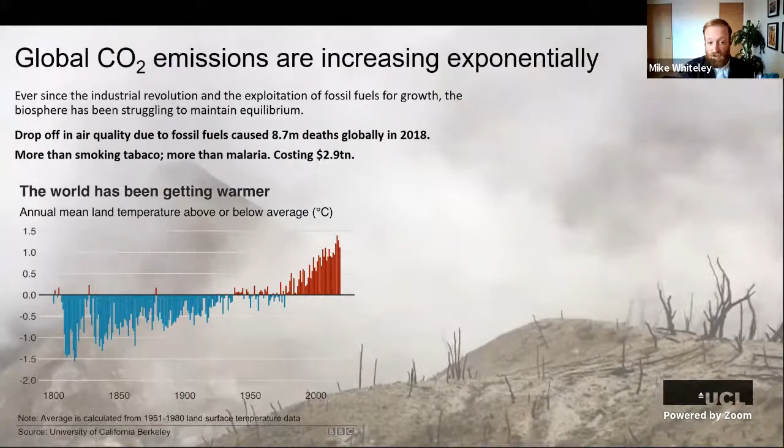And I've mentioned some of the global level difficulties here, but there's also local air quality concerns. So some recent work by UCL, that was in the news recently, has shown that a drop off in local air quality due to fossil fuels actually caused 8.7 million deaths around the world in 2018. To put this into context, this is more than smoking tobacco or malaria, and costing the health service more than $2.9 trillion. Some of this data from California, Berkeley, shows that the globe is warming up, and we need to put the brakes on.

And when we talk about transport, this can be anything from personal transportation, so how you get around in your car or on public transport, all the way up to international flights for your holiday in aviation, but also freight, so on the roads through heavy goods vehicles or in international shipping. And because the government is signing up to these ideas of reducing emissions, the UK industrial strategy has 4 grand challenges, and one of those has been set as the future of mobility.

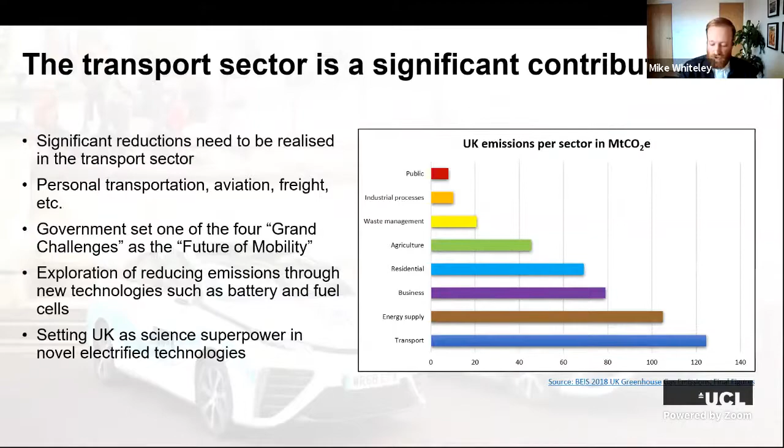Through the future of mobility, we're exploring reducing emissions through new technologies such as lithium-ion batteries and hydrogen fuel cell technologies. And ultimately, we're trying to set the UK as a science superpower in these novel electrified technologies. So I think sometimes we can be quite critical that governments aren't doing enough, but I think we're in a good position in the UK where the government is getting behind these ideas.

So there's the ban in 2030 of petrol and diesel cars. This basically means that in 2030, it will be illegal to sell cars in the UK that are 100% powered by petrol or diesel internal combustion engines, and they must have some kind of significant hybridization. So plug-in vehicles and full hybrids will still be available, which is a great first step.

And then a close target after that of 2035: every car sold in the UK must be 100% zero emissions, so have no internal combustion engine whatsoever. And some of you may think, well, this is a long way away, 2035, we've got lots of time, what's the worry? But if you know how the automotive industry works,

if a car company, just pick any car manufacturer, is designing a new vehicle, it will take 5 years or more just to design their latest model of a car that uses their conventional petrol and diesel engines, where they don't have to think about a new technology. But now they're going to have to think of what's the power source of the future, what's the propulsion system of the future, and do all this in a very short amount of time.

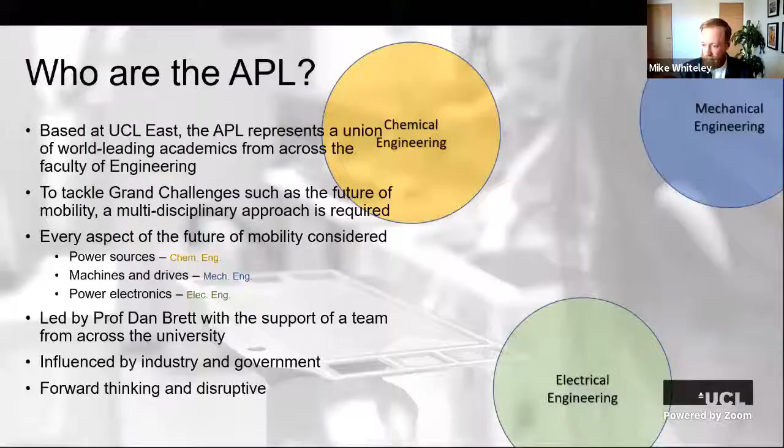Based at UCL East, the APL represents a union of world-leading academics from across the Faculty of Engineering. So as you can see here, we have chemical, mechanical, and electrical engineers all coming together in this trifecta of excellence, bringing all their expertise from their respective fields. And that's because to tackle these grand challenges, such as the future of mobility, we need this multidisciplinary and interdepartmental approach. We can't use the conventional academic way of having these siloed structures.

So when we created the APL and the vision behind it, we thought, what is the application of the future, be it a passenger car or a train or whatever it is that needs these new technologies? What would it need? And obviously we need new power sources. So that's where we need these new engines that don't use fossil fuels and don't burn anything. So this is batteries, fuel cells, supercapacitors, and that's where the chemical engineers come in.

And then machines and drives. How are we going to turn this electrochemical energy into useful work, how to propel a vehicle? And that's where the mechanical engineers come in with electric motors and electric powertrains. And then finally, with the electrical engineers, we're looking at power electronics. So how can we charge and discharge these systems? How can we monitor them, make them talk to each other? And that's where the power electronics is where the electrical engineers come into play.

So ultimately, this is led by Professor Dan Brett, who's a chemical engineering professor, but he has a support team from across the university. And these last 2 points, I think, are quite important. The work that the APL is doing on UCL's campus is heavily influenced by industry and government. We see that the work we need to do needs to have a commercial viability. It needs to be something that will be implemented and used by the general public for the benefit of society.

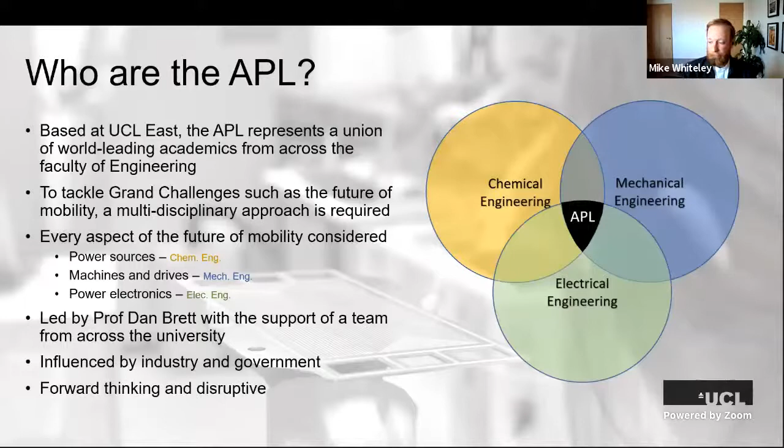So I hope that gives you the overall view of what the problem is and how we're trying to answer it. Now we'll do a bit of a deep dive into some of the technologies that we're currently researching and scaling up at the APL. And as mentioned previously, hydrogen fuel cell work was my bread and butter. This year is my 10th year looking into this research, which makes me feel old, but this is the stuff I get excited about. So we'll have a bit of a deep dive here, so strap your thinking cap on. I promise it won't get too technical.

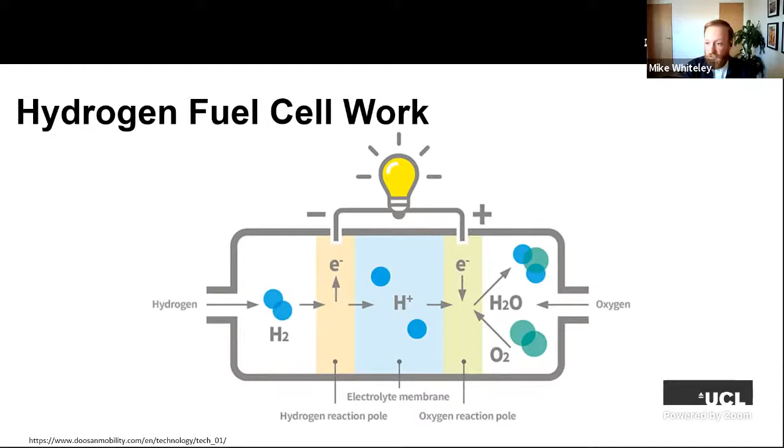Whilst all this is happening, at the other side, oxygen just from the air that we breathe is passed over the other side of the fuel cell, meets another catalyst area, and then this is where the proton and the electron from the hydrogen side meet the oxygen molecule, and that's where we form H2O, which is just water. So at the point of use, a fuel cell only emits water vapor, which makes it a perfect green technology at the point of use.

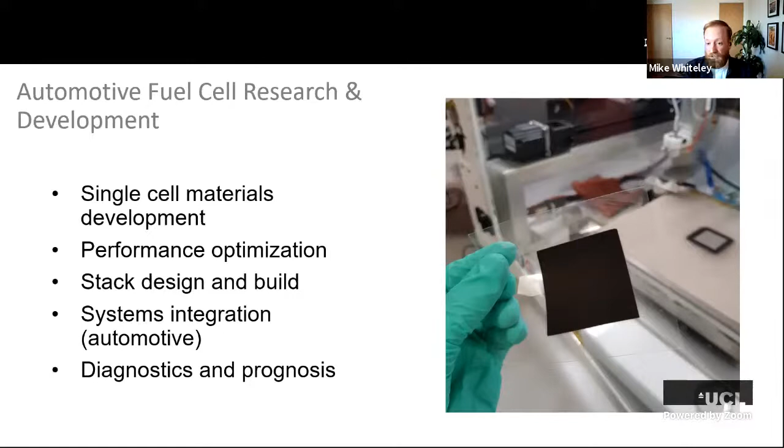In this application, where there's 60 or 80 cells, you can get around 60 volts. And then when you multiply that by the high current that a fuel cell produces, you can then get, I think this one here is about 8 to 12 kilowatts in power. And that's enough to power everything in your home, from your TV, your lights, your kettle, electric shower, and that's how fuel cells could be used.

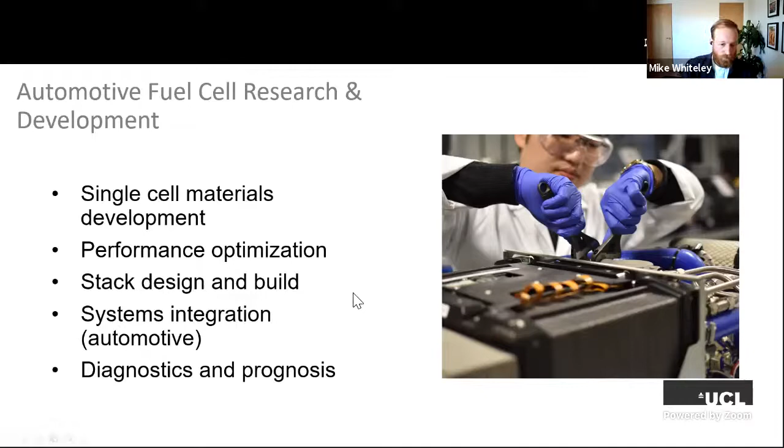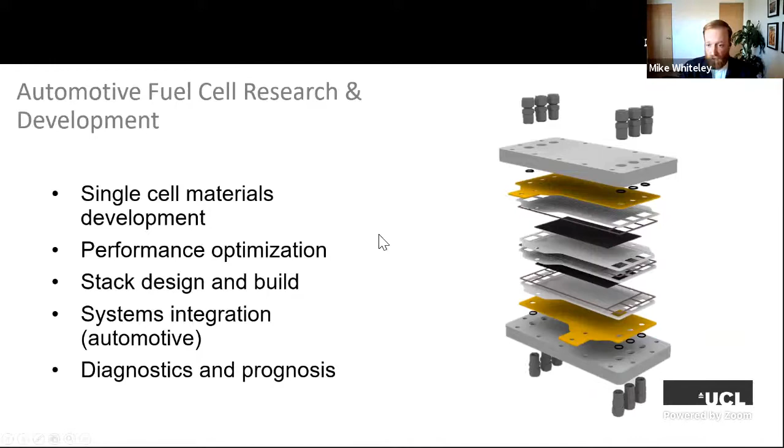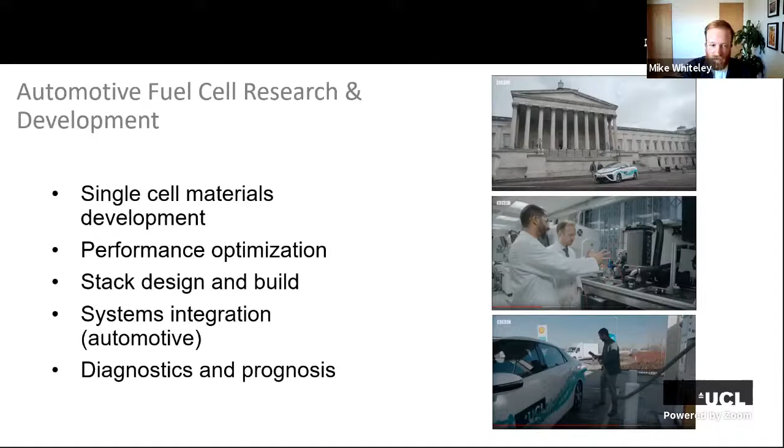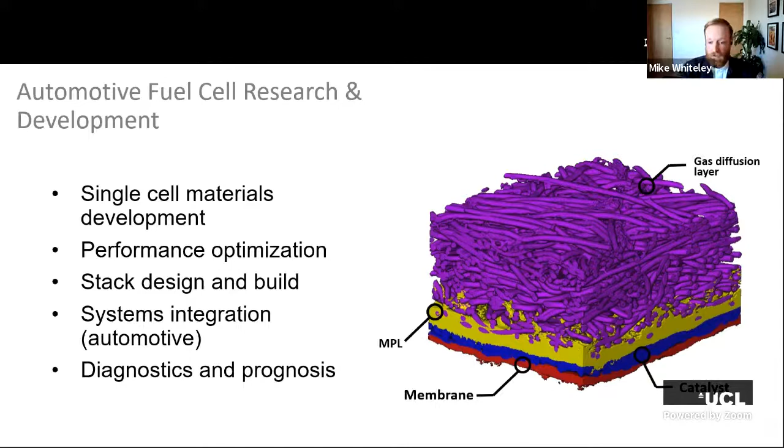So to stay with that thought process and CT, I'm going to give a bit more detail of the recent work that we've done with CT and a recent paper that we published. So these next two slides with Homer Simpson, they're brilliant. They were kindly given to me by Dr. Francesco Iacoviello, who's in UCL. He's the X-ray guru, and this explains the process that we use.

And some of you might have come across this before, where you've heard of CAT scans or CT scans for internal medicine concerns, and it's used in the medical field a lot. It's the premise of using a radiation source, like an X-ray tube, passing through a patient in this case, and then at the detector side, you can see what's happening inside. And we use the same thing to look at what's happening inside batteries and fuel cells and supercapacitors. But the radiography, that's one picture that you normally use for looking at broken bones.

But the CT aspect is if you can take one image, rotate the object or patient, take another image and do this through 360 degrees, you start to build up a lot more data. Now, in a medical context, the patient normally lies on a machine still, and then the machine goes around them. We do the same, but in reverse. So we have the machine staying still, and then we rotate the fuel cell or battery. So once you've taken all these images, you've got quite a lot of data. We can then use machine learning techniques to reconstruct all these images in a computer environment.

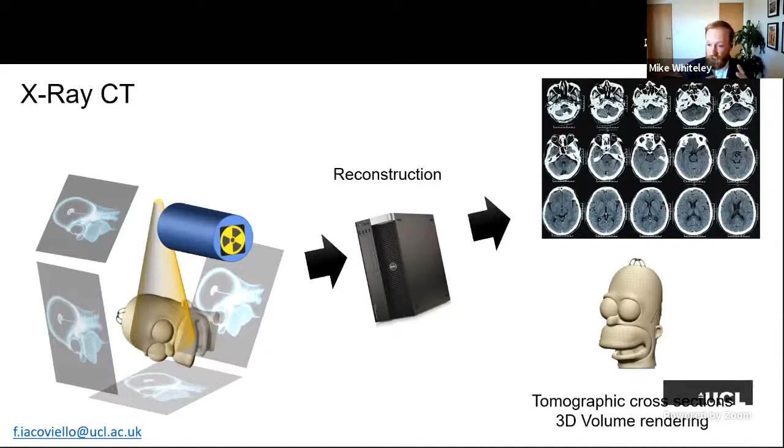And then we have two different ways of looking at this data. So the top section here is something called tomographic cross sections. This is where you can look slice by slice through the thing you scanned, looking at the internals and seeing what's happening. And at the bottom here, we can also stack these all up effectively and build a 3D volume rendering. And that's what you saw previously for a fuel cell. So I'm going to go on to a paper that we recently published looking at exactly those techniques for fuel cell research.

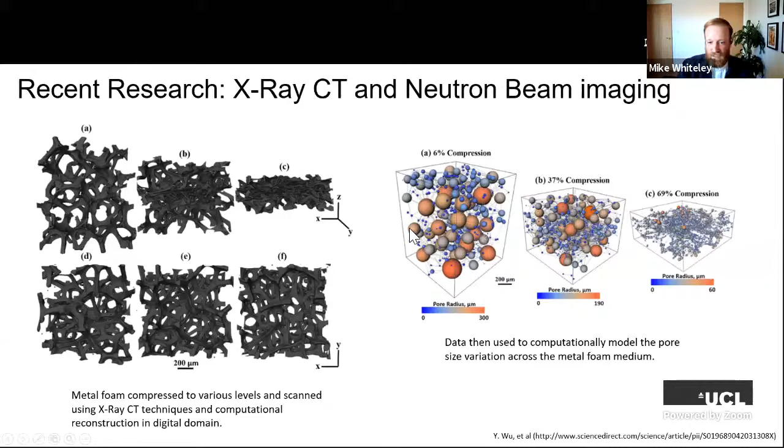So if we want to look at how fuel cells operate, such as gases in and out, water in and out, we can do things like computational fluid dynamics, or CFD. So this is a technique where you can use the model that we scanned in a digital domain to model how fluids, so it could be a gas or a liquid, flow through your material.

And as you can see in this application, the more you crush the metal foam, the faster the gases go through. Which sounds great, because that means you get more gases going through, you get higher rate of reaction, more power. Well, yes, but it's at a trade-off, because we also did some pressure drop analysis, which showed the more you crush this material, the harder you have to actually force those gases through, because of these Venturi effects where you get the speed up of gas.

So that means, yeah, you do get more performance out of the cell, but then your balance of plant systems, like the air compressor, has to fight a lot harder to push these gases through. So there's this fine balance to be had in fuel cell systems engineering.

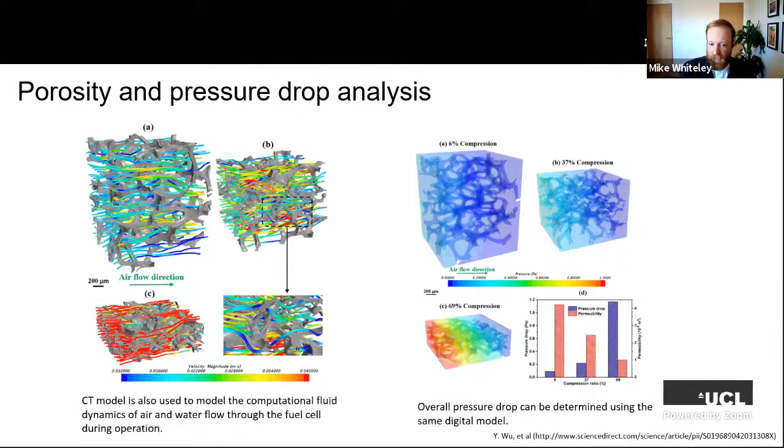So to marry with the in-house CT capability, we also use a technique called neutron beam radiography with our partner institutions internationally. So this is a similar principle. It's imaging of electrochemical devices, but on a much higher energy level. So this is a representation of the facility we use in Germany. We recently took a group of researchers to this nuclear reactor. You have to be at a nuclear power station.

And then we tap off a supply of neutron beams, these high energy beams, that can pass through your object of interest, so ours is a fuel cell or a battery. And the great thing with this is it's such high power, there's such high energy, that they don't really interact much with the metals. So you can put an entire fuel cell in there, an entire battery pack, and the neutrons will only really interact with the water molecules.

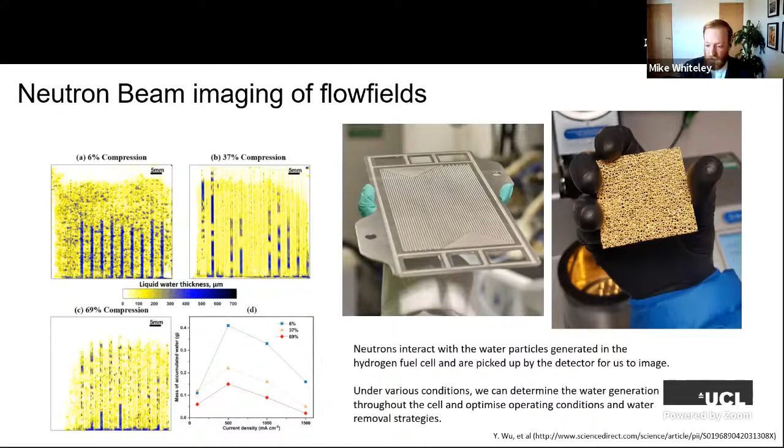But that is the small scale. That is from the nanoscale up to the single cell work. But as I mentioned, we also do systems work and industry-facing work. And this just shows a recent interaction we had. We were approached by Hyundai to launch their new fuel cell car, the Nexo. And through this project, we wanted to show that fuel cell cars during operation don't emit nasty particles.

But interestingly, fuel cells, because they have an air feed, they need to have an air filter. So what we were trying to show with this experiment was, fuel cells, when you use them, don't only not emit carbon emissions, but they actually clean up as you drive because of this filtration system. So what we did is we looked at these numbers here, which are PM2.5 and PM10. And that's basically particulate matter that measures 2.5 microns or 10 microns in diameter.

And these are the emissions that you get in local areas that are severely damaging to health, and the reason why quite a few streets in London are over the limit set by the World Health Organization for these particulates. So what we did here, this is me before lockdown, before the beard, putting PM2.5 and PM10 into this big ball.

And almost like a dirty crystal maze, we had this carbon-infused sphere at the front of the vehicle. And when we ran the car, it consumed the cloud of soot at the start, and then at the back of the vehicle, it emitted just water vapor and clean air. And we used this as a bit of a press opportunity. The Hyundai representative unzipped the balloon at the back and got inside and showed that it was all clean air.

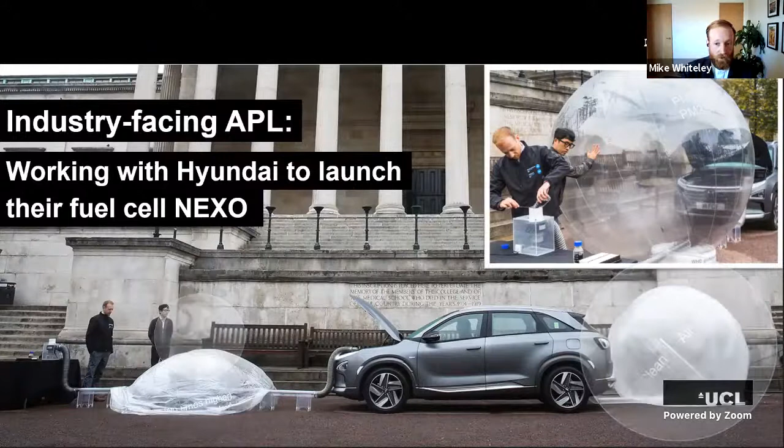So hydrogen fuel cells is my bread and butter, as we've mentioned, so I've done a bit of detail on that. But I should also mention the work we do with batteries, which we do quite a significant amount on. And the principles are quite similar. They're electrochemical devices. They have anodes and cathodes and separators. But where they differ is, fuel cells have to have a constant stream of hydrogen in one side and air in the other to keep producing electricity, whereas a battery has everything contained within. It doesn't need a fuel, everything's within the cell.

And what they do is they wrap these anodes and cathodes and separators up into a roll in a canister, which some batteries you might have seen, or in a pouch. But basically, it's the same kind of functionality. But the work we do with batteries, just to take a snapshot, is the same as fuel cells, from small level to big scale. And these are some examples of the work we do with battery safety.

So these are some examples of where batteries have gone wrong. And unfortunately, because all of the reactants are stored within a battery, which is great in some instances, the safety concerns are quite severe. So if you think back to your school days again, this is the last time I'll ask you to do that. The fire triangle: everything you need for a fire is an ignition source, an oxidant, and a fuel. All of that is within the battery.

So even if you think of NASA here, we work with NASA on some projects for battery safety. If they want to send batteries up onto the space station or into space, you'd think, well, you can't have a fire in space, it's a vacuum.

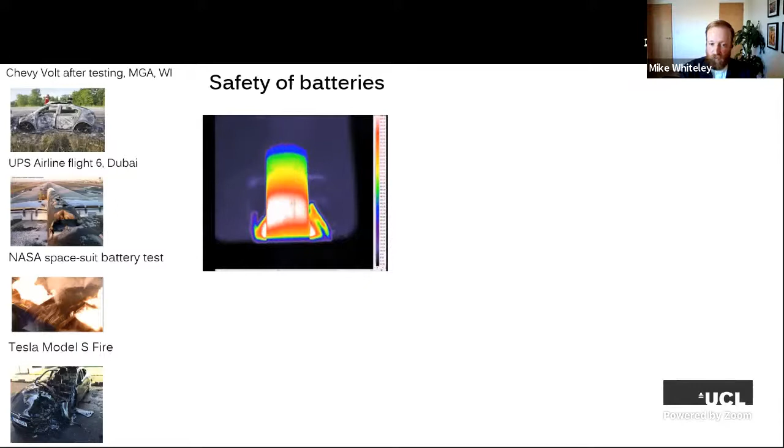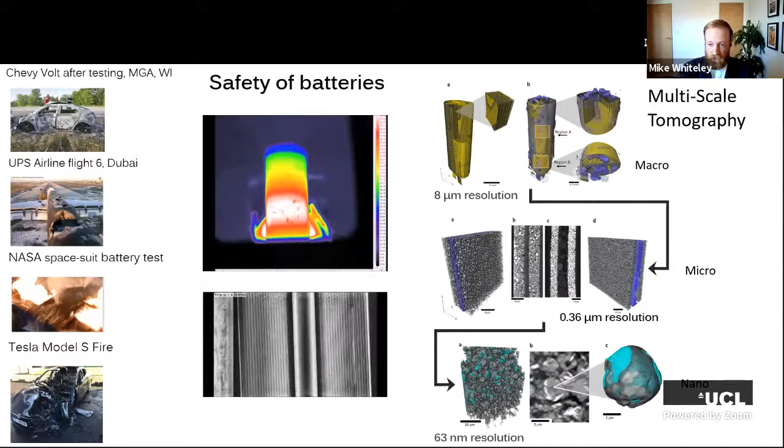So as I mentioned with fuel cells, we do work from the fundamental level to more higher systems levels. And this is an example of some work by one of our promising researchers, Robert Mather, and he's working on looking at battery management systems. So trying to operate batteries in a way that we can avoid those spectacular failures. And some of the work that we do here is relating to these batteries called 18650s, and that's just a designation of how big it is. But this is a very common battery.

And if you think of a Tesla electric car, they actually have up to 7,000 of these individual batteries linked up underneath the car. And obviously you don't want one of those going wrong because they have this chain reaction that would take them all out. So in an ideal world, you'd put a temperature sensor and a voltage and a current sensor on each cell, so you know exactly what's happening all across the pack. But unfortunately, you can't really do that because of cost concerns and the amount of space you have in the system. But what this research has been looking into is looking at these little Hall sensors. So very inexpensive sensors that can be picked up for a matter of pence.

And he's integrated these into a PCB, so a printed circuit board, and then we can have an individual map of voltage, current, and temperature across each cell. This is a module, but if you scale that up to a pack, you could do it across the pack. And this gives us a lot of data to show what's happening inside. And we've verified this with thermal imaging.

So we can say, oh, it looks like through using our new BMS, cell 8 is doing a lot more work than cell 1. And then when we actually look at this from a thermal camera, yeah, we can see that there's a lot more heat in one side than the other. And how can we stop that? Because that means the hot cells are going to degrade quicker than the other cells, and kind of make the battery pack of the future a bit more optimized. So we verify this in a variety of ways, but we also are pioneering some ultrasonic imaging techniques.

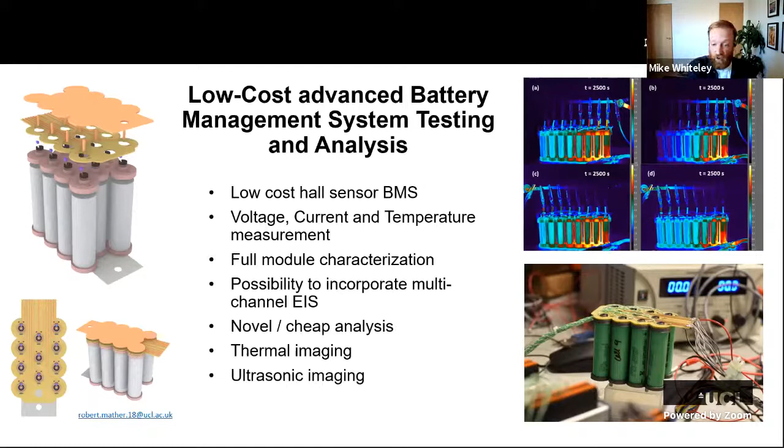And then you can see, are these layers increasing in size over use? Are we getting gassing? This is a way to look at degradation. Or are they getting too close and they could short circuit? So we're looking at pioneering these new techniques using conventional equipment, but repurposing them to look at these technologies of the future.

As I was saying, we're growing, we're expanding. The work we can do now in Bloomsbury is restricted to a lower TRL, or technology readiness level, because large battery packs, like 7,000 batteries in a Tesla, or a fuel cell stack that's very large, about the size of a filing cabinet, we can't actually do now in Bloomsbury.

The electrochemical side of the APL is already more than 90 researchers strong, which represents more than 400 papers published in leading academic journals, representative of more than 7,000 citations. And interestingly, over £40 million of funding has been realised through the Electrochemical Storage Group since 2011. And just to show our industry acumen, we've also had 2 companies spin out with new technologies that we've developed in the labs who are doing really well.

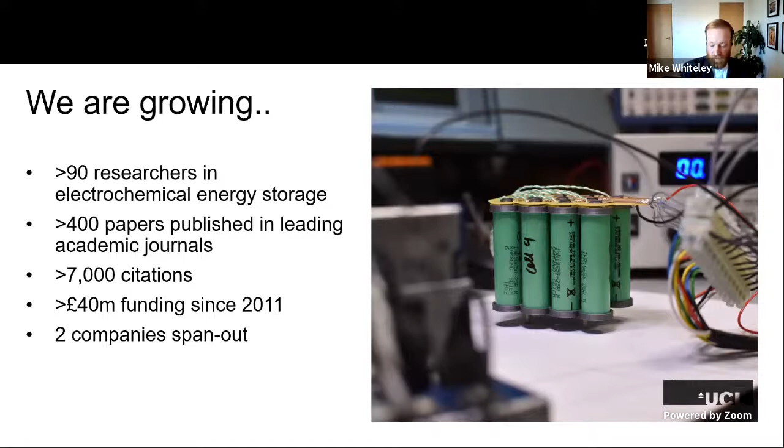And the APL is going to have around 1,000 square meters of space to look at teaching and R&D, accelerating the technology readiness level from the lower levels, which will stay in Bloomsbury and carry on and keep prospering. But then we can scale up and do big battery packs, big systems, big electric motors, putting these into actual vehicles.

And the important thing about this is this gives us more of an opportunity to work with industry on these higher TRL technologies. So we can talk to companies who are looking at hybridizing their fleets, or they want to develop a new technology to decarbonize an application that they have. This is exactly the kind of work we're looking into. And in fact, my daily role now is to talk to companies and government about how we can forge these partnerships for mutual benefit.

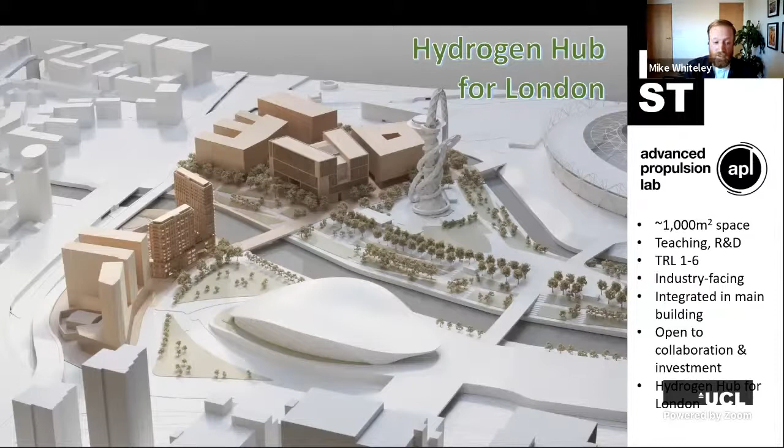But interestingly, we've had some good discussions recently about extending the APL's activities to a hydrogen hub for London. And this is because we're in such a great position on the East Campus to benefit from the local waterways. So can we look at using these to test marine applications, or even ship in hydrogen that's been generated by the wind turbines on the East Coast into London? But also looking at having a hydrogen refueling station on site. So here we're looking at being able to implement a vehicle fleet or have hydrogen buses running around campus and having a place for those to refuel.

And the interesting thing about the difference between fuel cells and batteries is that fuel cell vehicles can be refueled in the same amount of time as a petrol or diesel car and then go back out, whereas a battery electric vehicle would have to charge a lot longer. However, we will complement the fueling station with electric vehicle charge points across campus.

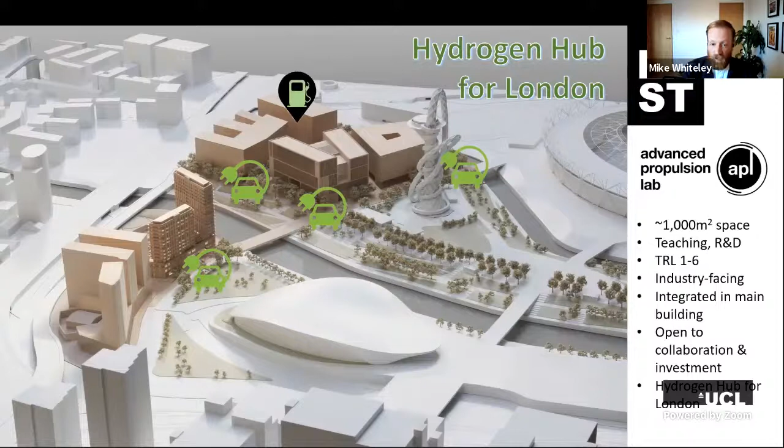But another opportunity we have is to use the local roads, footpaths, and local area to test personal mobility devices or disability mobility devices. So here we'll work with our partners in the Global Disability Innovation Hub. This is another entity at UCL East, or looking at, say, for example, e-scooters of the future, fuel cells and battery powered, or testing technologies within the campus.

And I think that's an important point to make of the opportunity we have at UCL East for APL. It's bringing these technologies up to the next level, up to the industry-facing level, and working with key partners who want to invest in these areas and react to what's happening in the industry because of these main drivers to change to an electrified solution, and working with them to develop these technologies and test them in a living lab concept.

So how can we make a difference at UCL? Well, I hope I've made it clear that there is a global concern. There's a big issue with climate change. The United Nations Sustainable Development Goals have shown the key areas that the United Nations are interested in. And these directly influence things like the UK government's industrial strategy. So this is where they are looking to develop these 4 grand challenges. With the grand challenges, the main 2 that are related to the APL is the future of mobility, obviously, which is the main one, and clean growth.

And where we can help as UCL is, like I mentioned previously, we are not on the back foot with this technology change. We've been doing this for over a decade. We are very well versed in these technologies, and we work with industry partners across the globe to develop these. And these industries are now changing with support of government. It's all coming together to show that UCL could be at the forefront of this green industrial revolution and benefit from being one of the leading lights in this development of electrification.